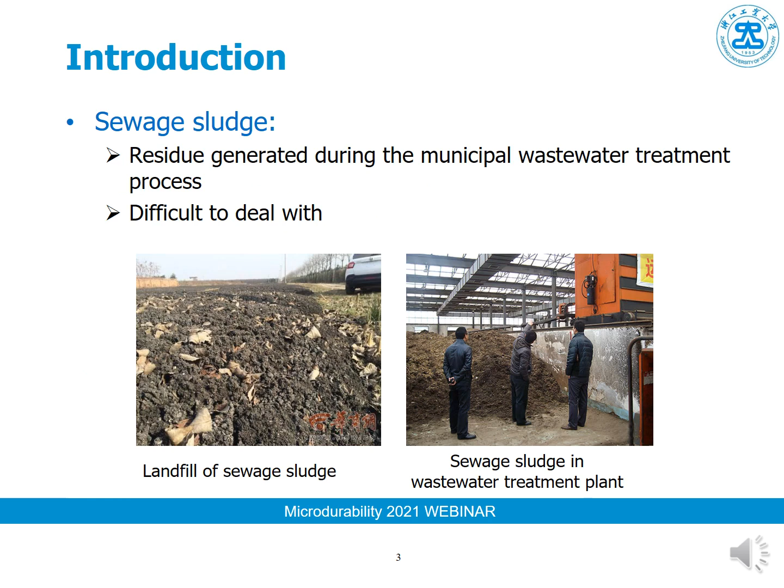Sewage sludge is a residue generated in the wastewater treatment process, and it is very difficult to deal with. Sewage sludge is normally disposed at the landfill or at sea, and it is sometimes treated for agriculture uses. But due to health reasons and environmental concerns, these methods are now becoming less acceptable.

At this time, the incineration method has become more popular because it can reduce the volume of the sewage sludge by 90% and reduce the weight by 70%.

Sewage sludge ash, SSA, is the residue of the sewage sludge incineration process, and it can be recycled in construction materials such as bricks, light aggregates, cement, mortar, and concrete.

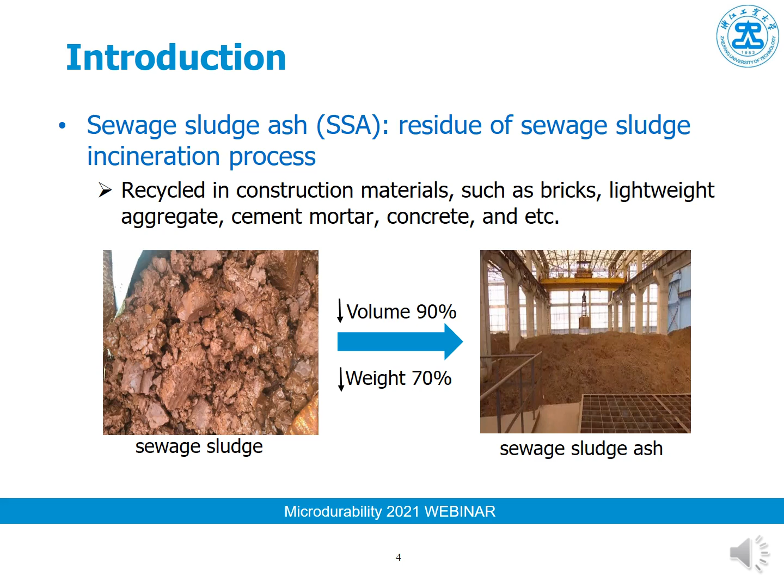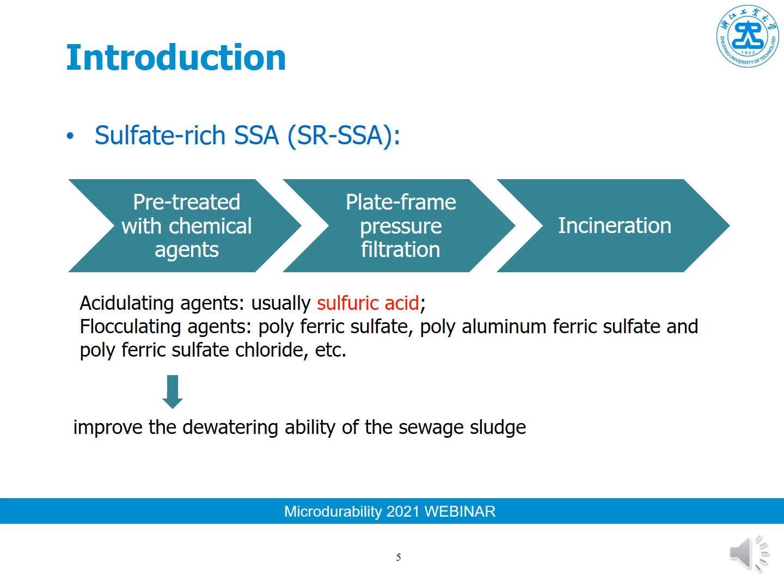In China, the sewage sludge ash is normally sulfate-rich because during the pre-treatment process, a lot of chemical agents are added in the sewage sludge to improve its dewatering ability, and these chemical agents contain a lot of sulfate.

Normally, the sulfate in cement-based materials will cause volume stability problems. So the aim of this study is to review the possibility of recycling sulfate-rich sewage sludge ash in cement-based materials.

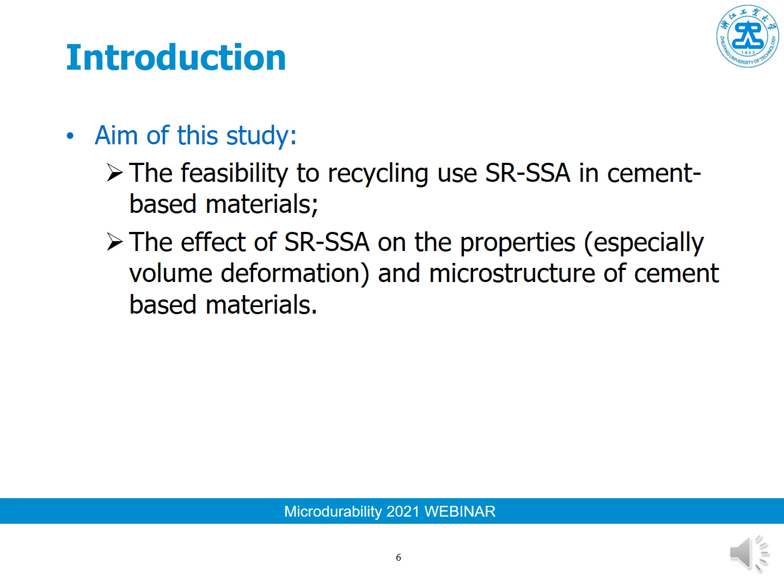So we studied the effect of this ash on the micro properties, especially the volume deformation and the microstructure of cement-based materials.

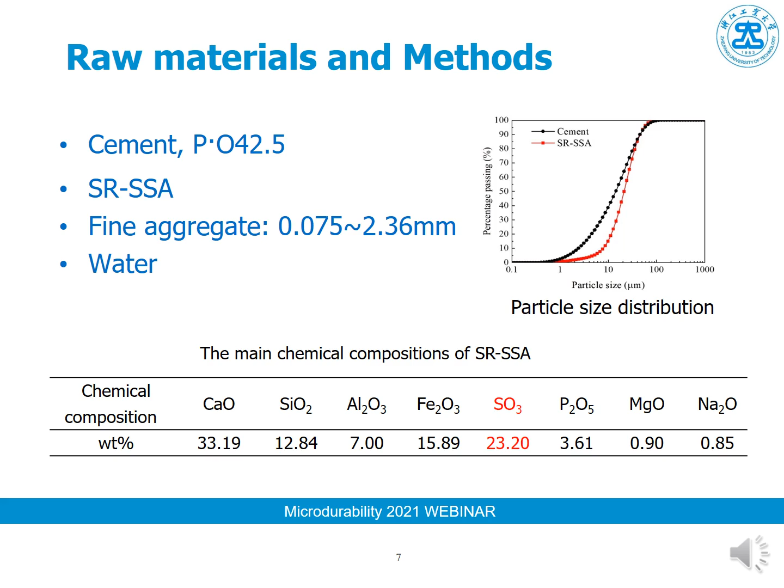The raw materials in this study included cement, sulfate-rich sewage sludge ash, fine aggregate, and water. From the table, we can see that the sulfate content in this ash is more than 23%, so there is a lot of sulfate in this kind of ash.

Here are the mix proportions used in this study. We prepared cement pastes, and the sulfate-rich sewage sludge ash contents were 0%, 5%, 10%, and 15%. The water-to-binder ratio was 0.4, and the paste specimens were used for microstructure studies.

We also prepared cement mortars with 4 ash contents, and the water-to-binder ratios were 0.4, 0.5, and 0.6, with a sand-to-binder ratio of 3.

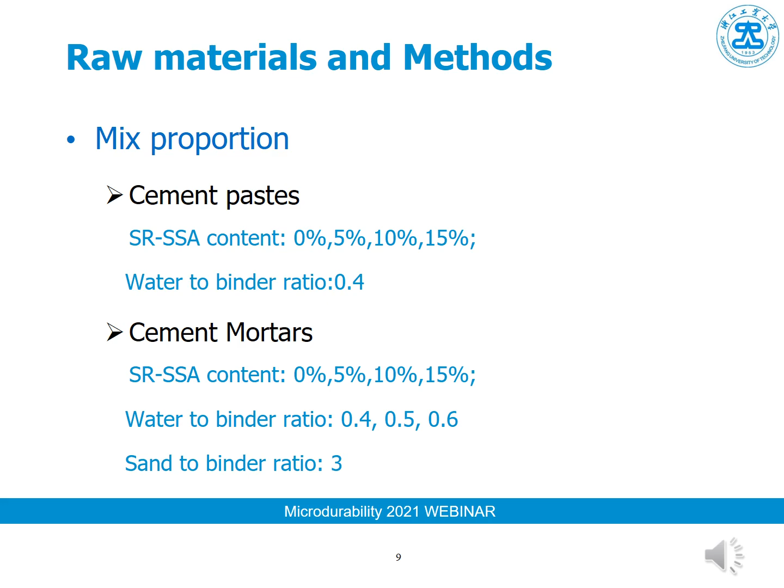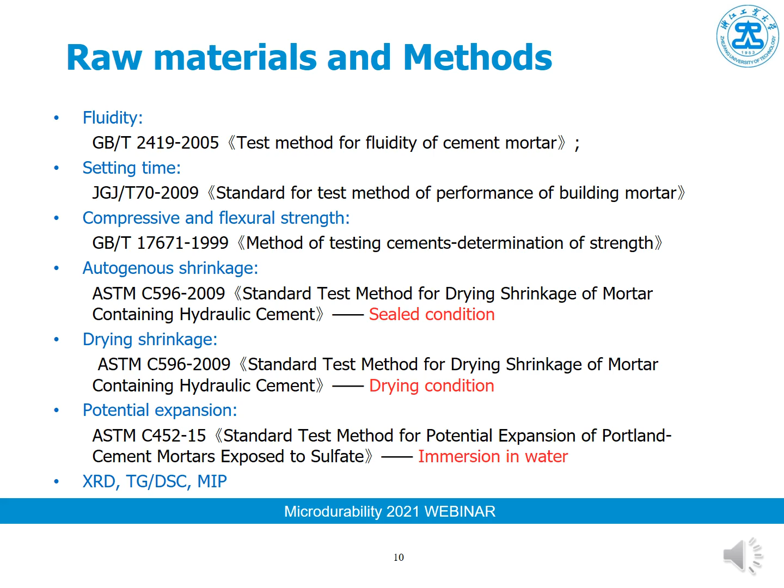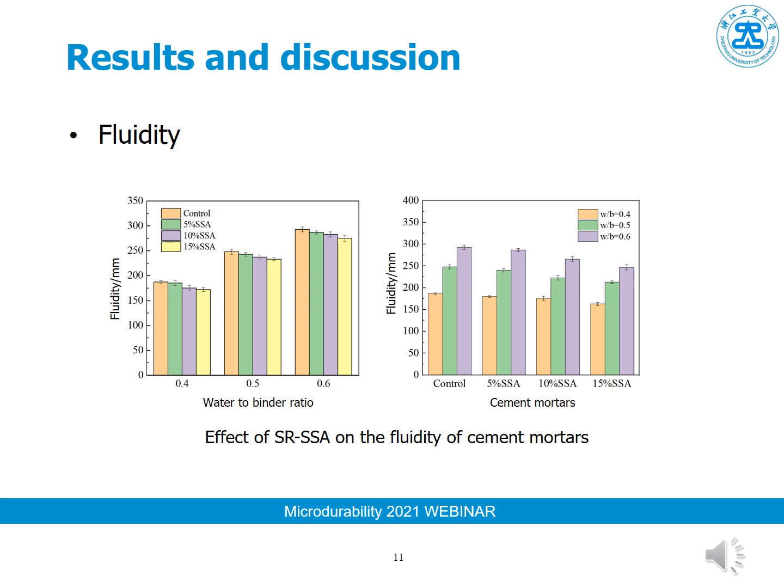This is the test results for the fluidity tests, and we can see that the addition of this ash reduced the fluidity of the cement mortar, and more ash resulted in more fluidity reduction.

Here are the setting time results, and we can see that with the addition of the sulfate-rich sewage sludge ash, the setting times of the mortars was retarded. This is due to the presence of zinc and phosphorus elements in this kind of ash.

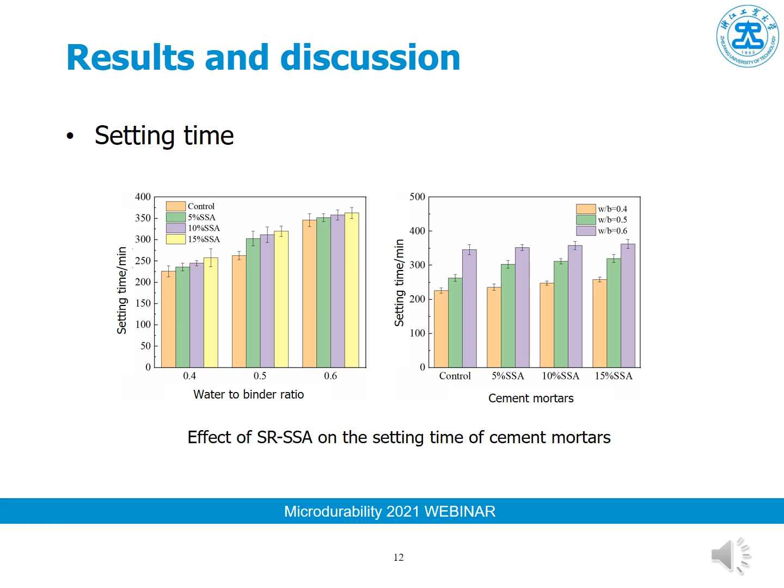This is the test results for the compressive strength tests, and we can see that with the addition of sewage sludge ash, the compressive strength of the cement mortar is reduced, and more ash caused more strength reduction.

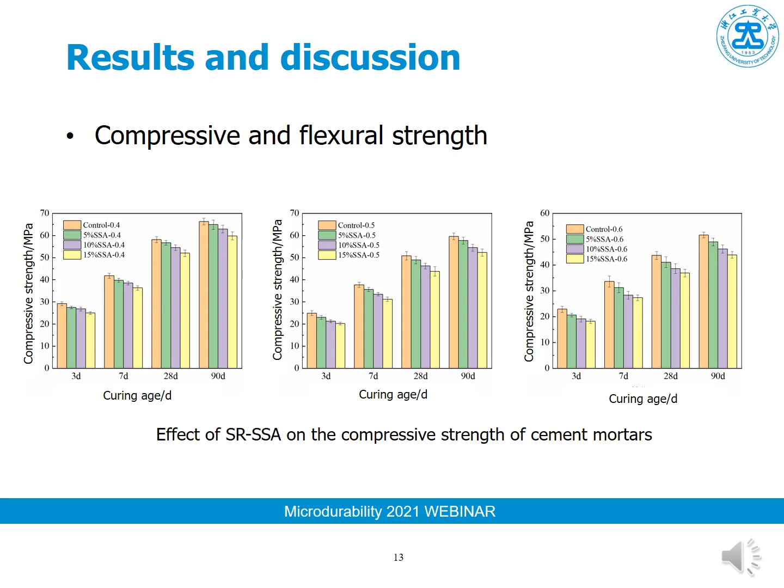It is the same results for the flexural strength tests. More sewage sludge ash results in more flexural strength reduction. So when recycling this kind of ash in cement-based materials, we have to take care of the strength reduction.

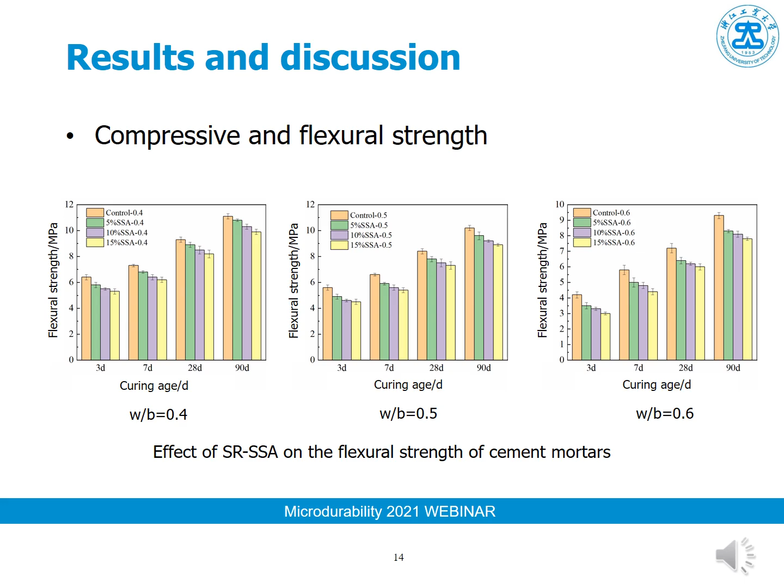Here are the test results for the autogenous shrinkage. We can see that before the age of about 3 days, the specimens expanded because of the presence of the sewage sludge ash. After about 3 days, the specimens continued to shrink, and finally the autogenous shrinkage was reduced by the addition of the sewage sludge ash.

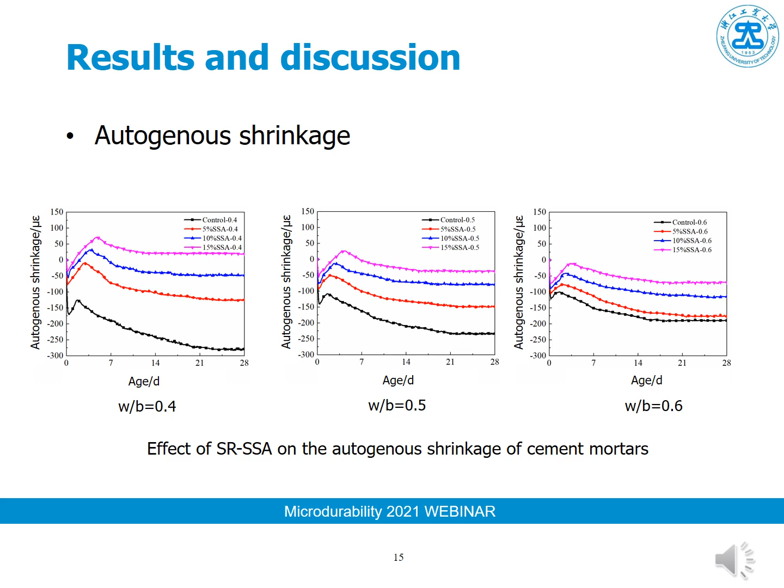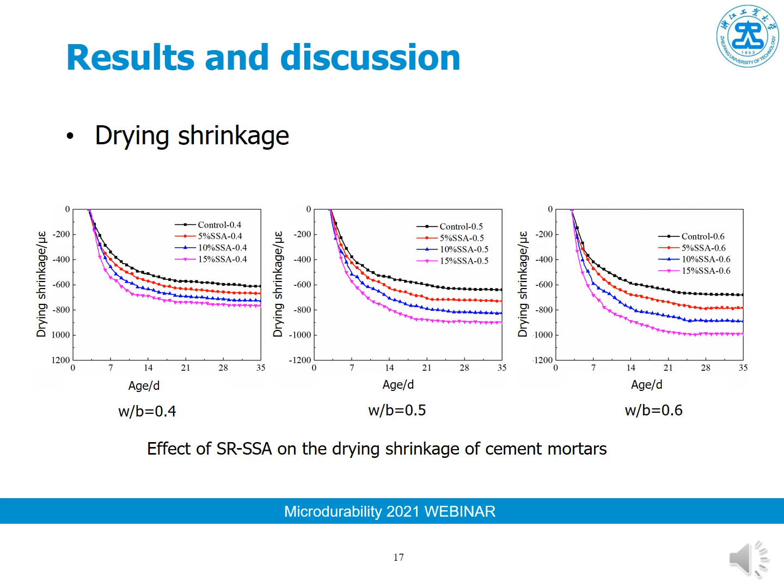This is the test results for the drying shrinkage. We can see that with the addition of sewage sludge ash, the dry shrinkage of the cement mortars was enlarged, and more sewage sludge ash caused a much higher drying shrinkage.

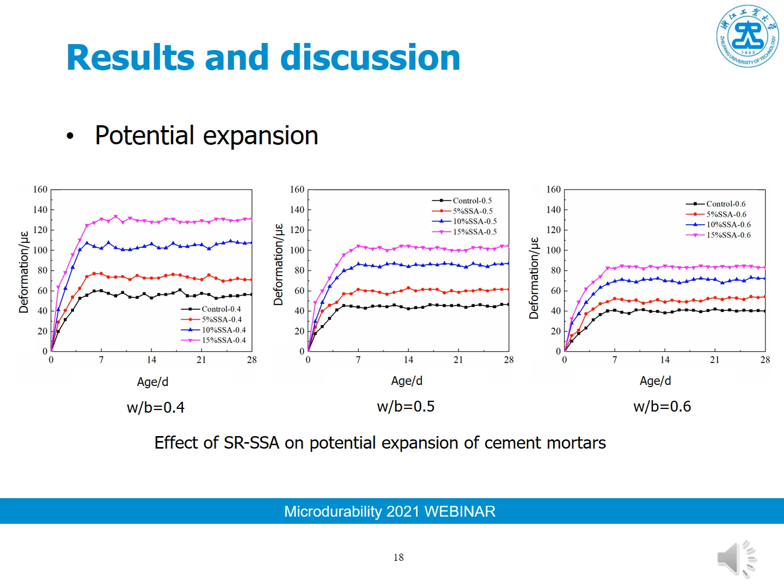For the potential expansion, we can see that when all the specimens were immersed in water, they all expanded, and more sewage sludge ash caused more expansion strain. So it might be true that the sulfates in the sewage sludge ash will cause volume stability problems to cement-based materials.

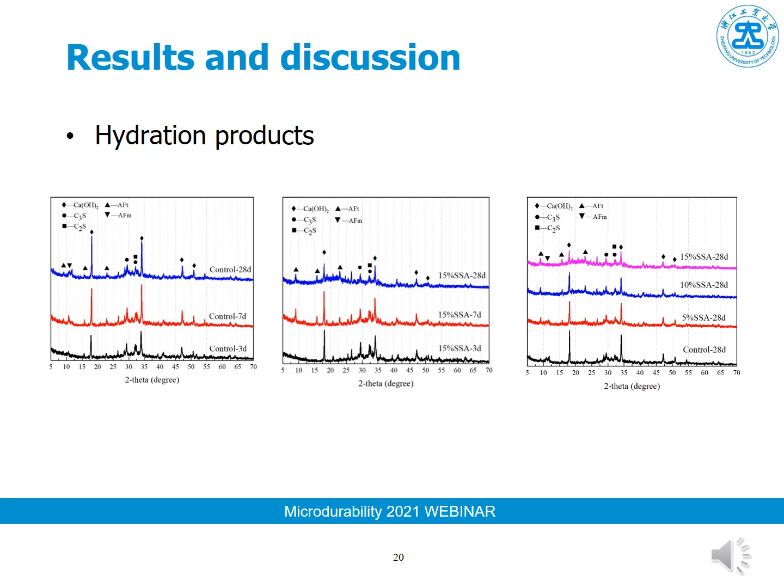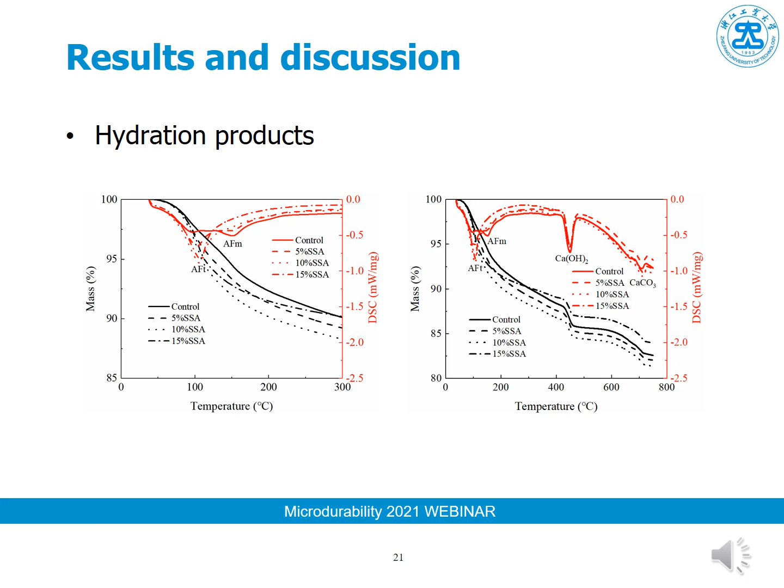From the results of the TG tests and the DSC tests, we also can see that more ettringite was formed in the cement paste with more sewage sludge ash. So actually, the formation of ettringite was the reason for the expansion during the volume deformation tests, such as the autogenous shrinkage tests and the potential expansion tests.

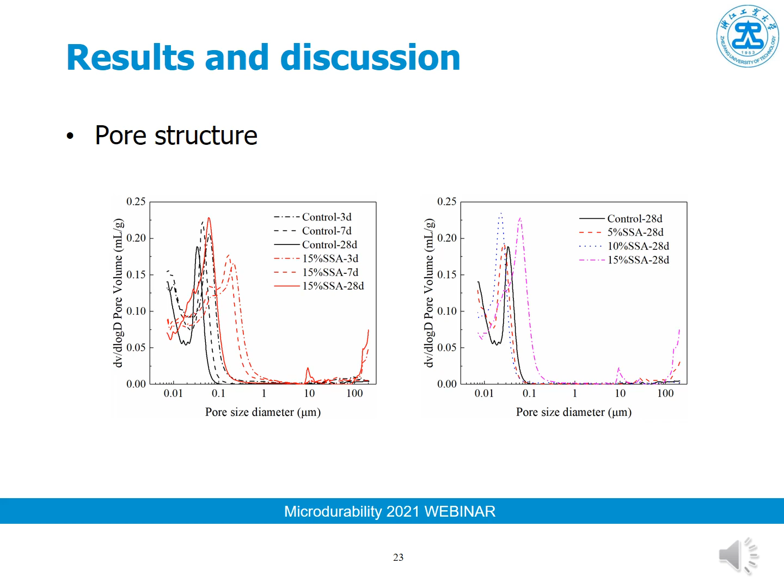Here we come to the conclusions. The addition of the sewage sludge ash reduces the fluidity, retards the setting times, and reduces the strength of the cement mortar. The addition of this ash caused expansion before the age of 3 days during the autogenous shrinkage tests and reduced the late age autogenous shrinkage.

The dry shrinkage was enlarged when sewage sludge ash was present, and it caused expansion when the mortars were immersed in water. When this ash was added in the cement paste, ettringite was generated and the porosity was enlarged. These are the reasons for the change of the macro properties of the cement mortar with sewage sludge ash.